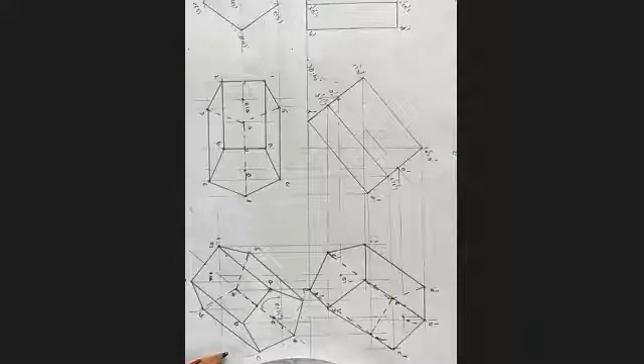Finished? I can take only 2 problems in 2 slots. 40 minutes, maximum 2 problems. Yes, Bhavya, Pragati, finished? No response at all. Finished, sir. Take one more problem.

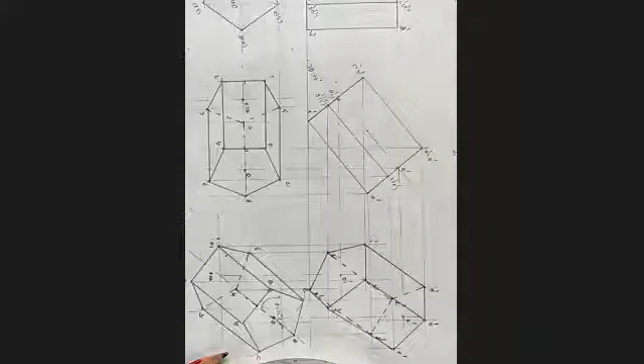A cone of 50 mm base diameter and 60 mm axis length rests on HP on one of its generators. Draw its projection when the axis is inclined to VP at 30 degrees.

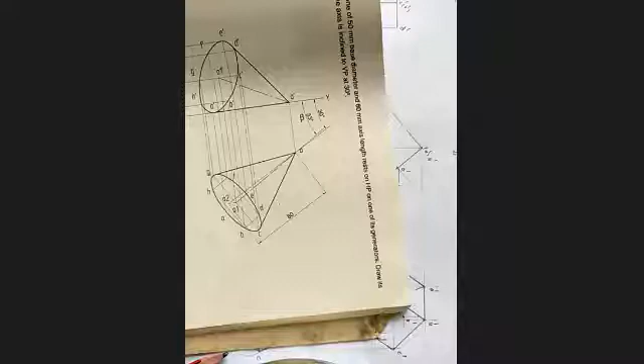Finished? Noted down? Yes, sir. See, here only one angle is given, but still it is a 3-stage problem. Now, same procedure. First, draw the XY line. What is the given object? Cone. Where is it placed? HP. How is it placed?

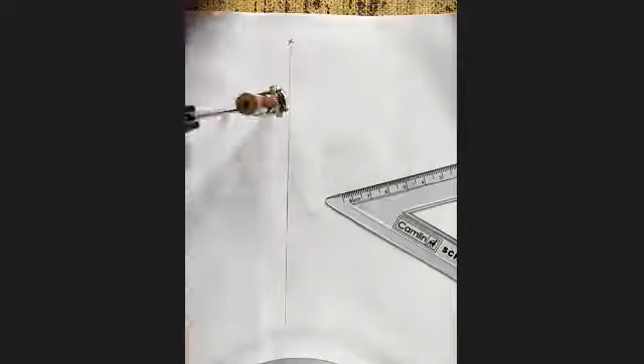There is no question of how it is placed. Agree? Why? Anyone? A circle does not have any corner or side. Earlier polygons had a side or corner, so we said where it is placed and how it is placed, side or corner. But a circle does not have side or corner, so take whatever you like as corner or side.

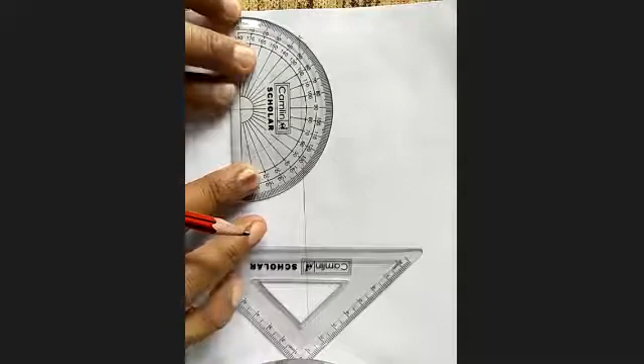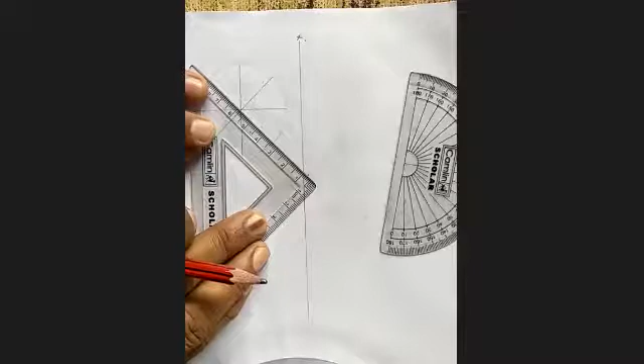I will divide this circle into 8 parts. Cycloid, can you remember? How many parts did I divide it into? Eight parts or 12 parts? Just say whatever. I divided into 12 parts, but now I am dividing into 8. You can divide into 4 also, but I will tell you why I am dividing into 8. So I divided it into 8 parts.

Name it. Is it a prism or pyramid? Tell me. Cone is a prism or pyramid?

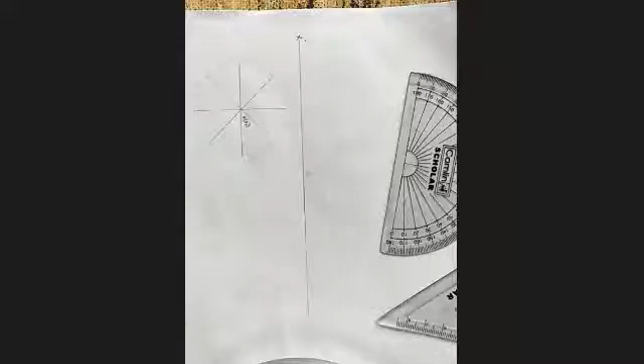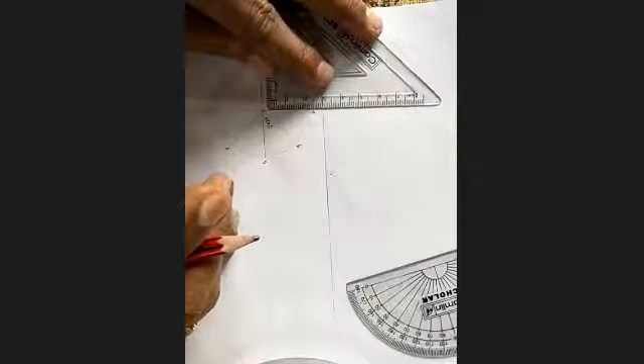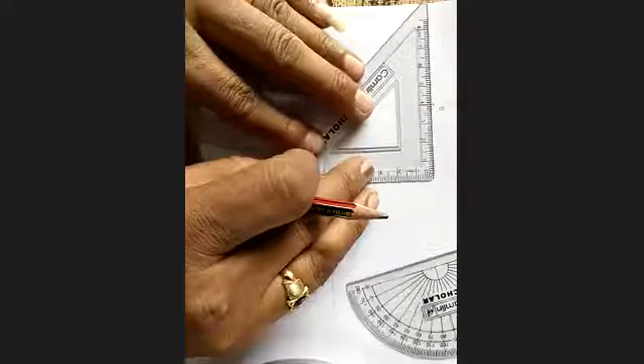Finished. Only one face. Draw the axis line. How much is given? 60. 1, 2, 3, 4, 5, 6. It is 60, and at 60 is the apex. Draw this line and measure; it is 60. Right. Project all the lines.

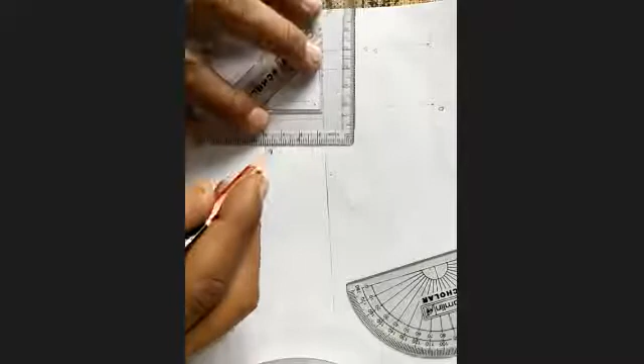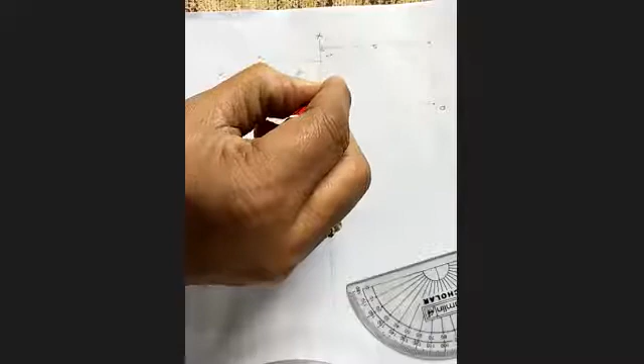Name that. Only one base. 1 dash visible, 2 dash visible, 8 dash not visible, 3 dash visible, 7 dash not visible. This is O1 dash also. 4 dash visible, 6 dash not visible. It is 5 dash. Make this base dark. Extreme end, 5 dash, join with apex. This one, join with apex.

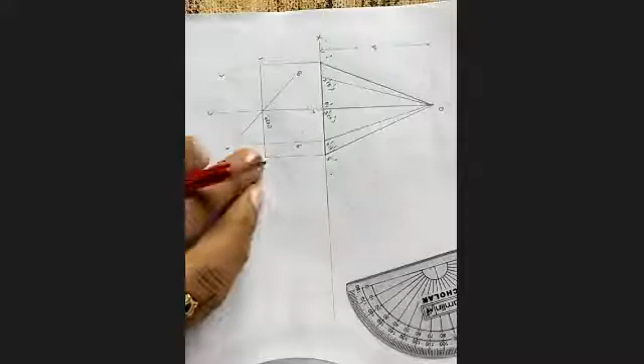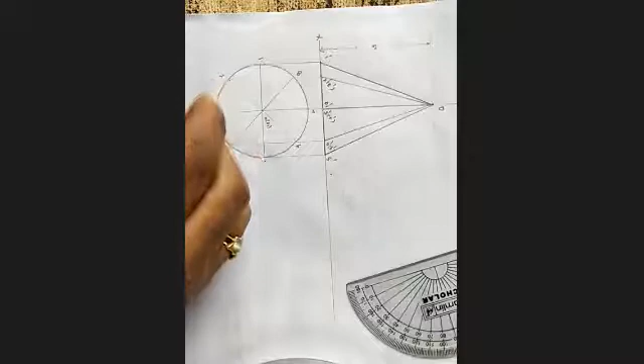This 2 is visible, 8 is not visible, but still make it dark. 3 is visible, make it dark. All generators of one side are visible, the other side is not visible. Finish. Don't make this circle dark, because I use a light pencil; in the compass I always use a 2H pencil only, so I get a light circle. Next, here there is no HP angle.

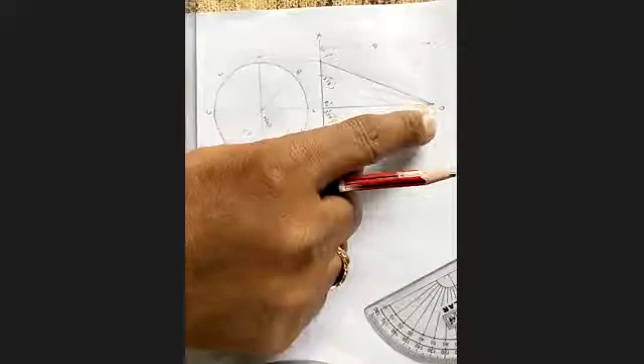A cone with a 50 mm diameter and a 60 mm axis length rests on HP on one of its generators. 5 and O is a generator. 5 dash and O dash is a generator. 1 dash O dash is also a generator. Agree? Yes, sir. Ice cream cone, instead of keeping it on base, keep it in sleeping mode.

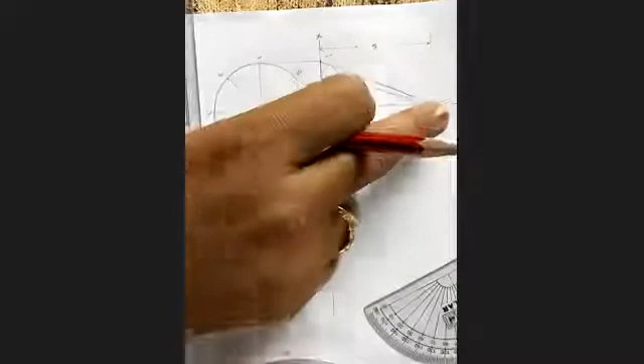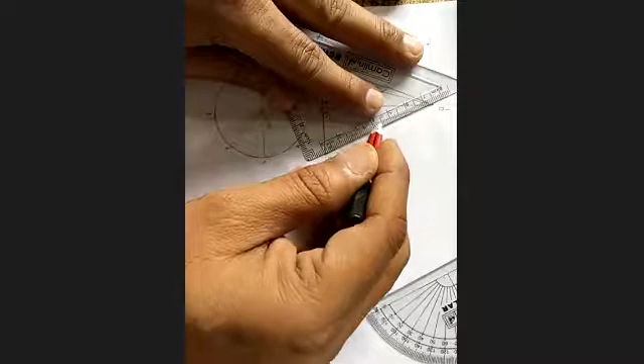Careful, student. Which side do you want, amma? 5 dash O dash or 1 dash O dash? You tell me. Which one you want? I will make it in sleeping mode. 5 dash O dash. Measure 5 dash O dash. So how much is it? Listen carefully. 5 dash. I am measuring 10, 20, 30, 40, 50, 60, 64.

Visible? 64. Visible? Student, yes. Measure 20, 30, 40, 50, 60, 64. What to do, amma? From this point measure 64.

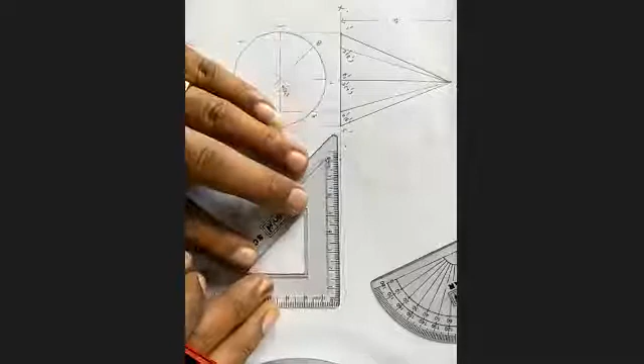See. 10, 20, 30, 40, 50, 60, 64. What is my point? How much? 10, 20, 30, 40, 50, 60, 64. Agree? Yes, sir. This is 5 dash and this is O dash. What happened, amma? It is resting like an ice cream cone on a rack. Instead of base, make it sleeping mode.

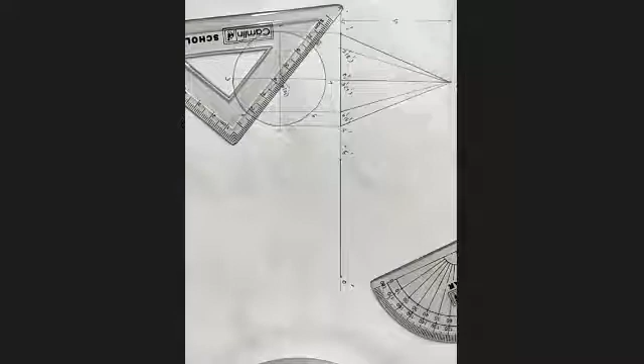Take an empty ice cream cone. You can try. Take one, you can keep it on its base. Can you keep the ice cream cone on its apex? On the apex, statically, no, it cannot. Then you have to keep it on one generator. So I have taken 5 dash O dash. You may take 1 dash O dash also, nothing wrong.

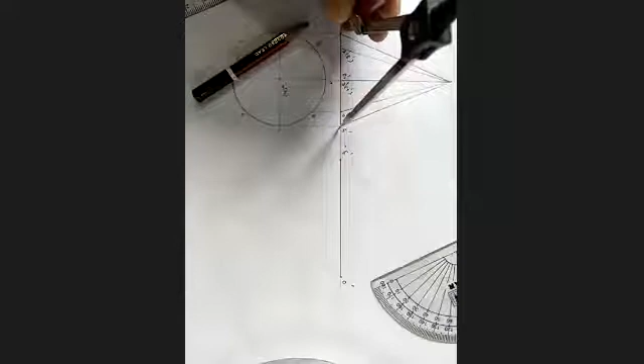After that, can I measure 5 dash to 1 dash, amma? Can I measure 5 dash to 1 dash? Visible? Yes, sir.

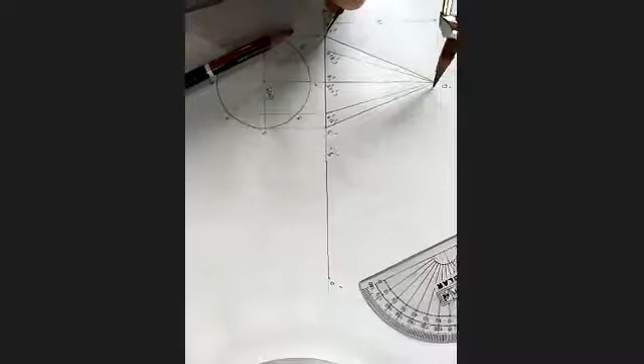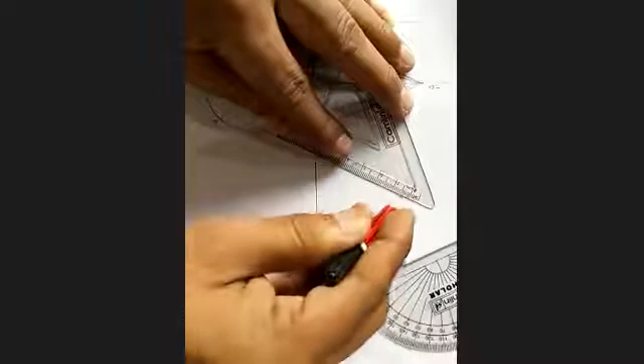This point is called 1 dash, amma. Join all. Who is that? Somebody is making noise.

See, this is your ice cream cone, amma, sleeping. Visible? Yes, sir. Same object set on one of its generators on HP. Whether you take this side or that side does not make any difference. Right. After this, measure, it will come at the midpoint. How much is it? 50. 50 means 2.5. Draw the axis line.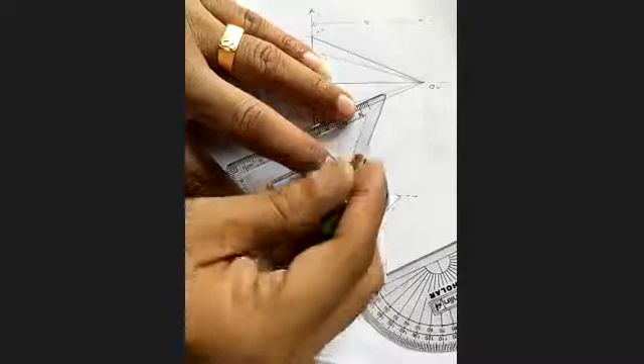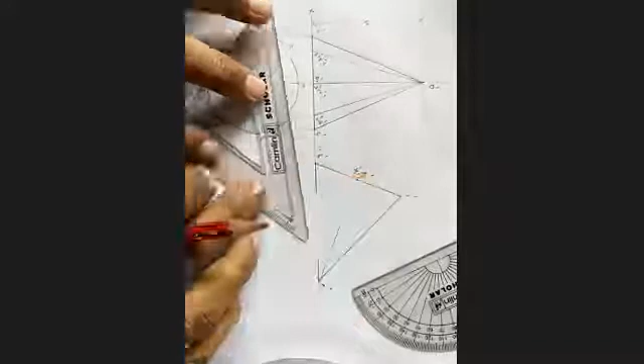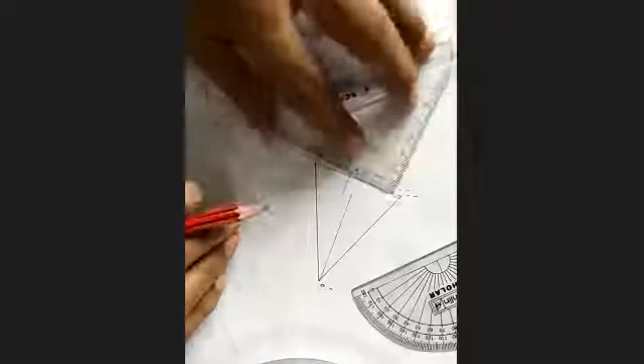Everything again you have to do in a reverse manner. This is the axis line. This point is O1 dash. Measure the other corresponding points. This point is 3 dash, 7 dash. Similarly, measure with respect to this side. 10, 15, 17. Both sides 17. From here, measure 17.

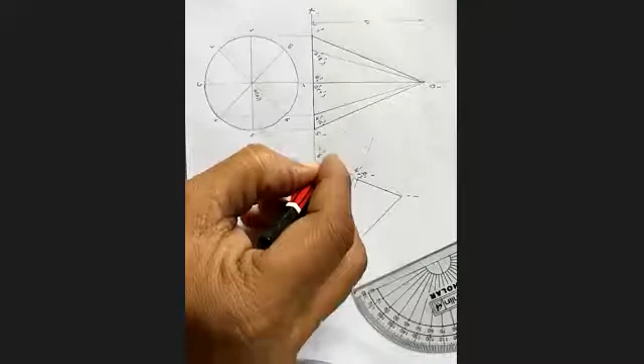This point is 4 dash 6 dash. This point is 2 dash 8 dash. Join them. Finish the same figure I drew. Agree? Here, the trick is that the object may rest on the ground also. There is no hard rule that there is an angle every time. It is resting directly on the ground.

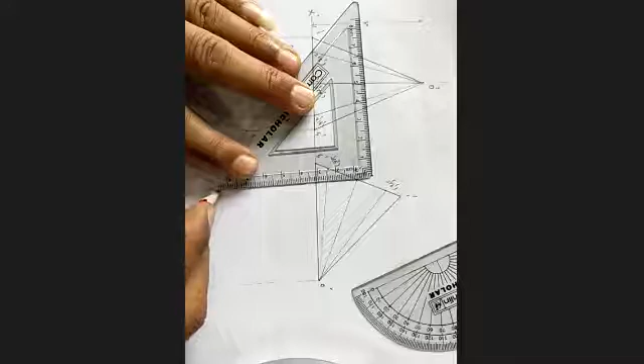Okay, after this, project this O dash. Same procedure. Project this O1. First bring the axis line down. Always target the axis only. This is O and this is O1. Project all the lines.

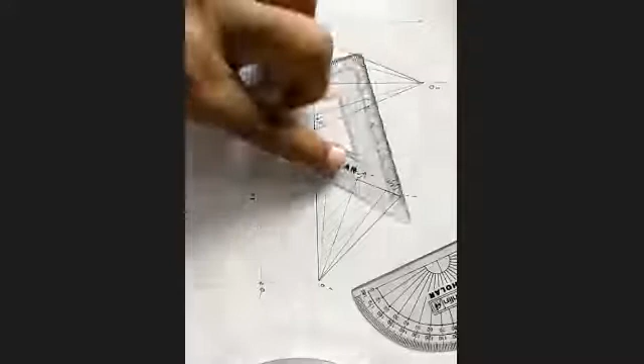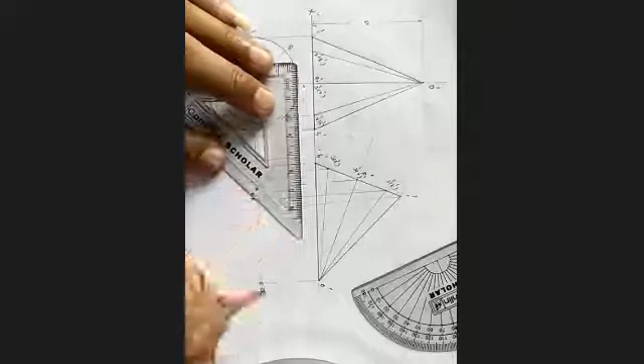Project this line. Project this line. Already this is projected. Project this line. Project these two lines. Already these two are projected. Project this line. Name it.

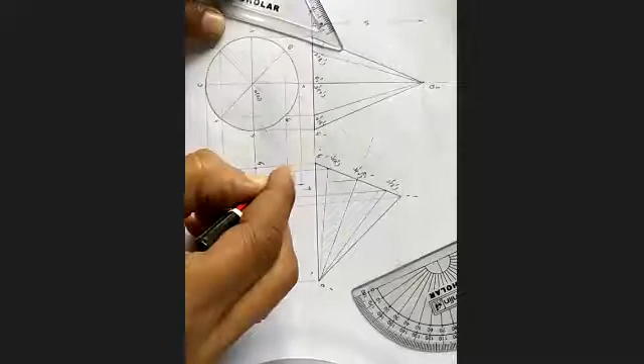Look carefully. 5 dash will come outside, amma. 5 is outside. Careful, amma. 1 is inside. This is 1. See. This is 8. This is 2. This is 3. This is 7. This is 4. This is 6. Careful. 1, 2, 3, 4, 5, 6, 7, 8. Take this experiment. 1 to 7. 3 to 7.

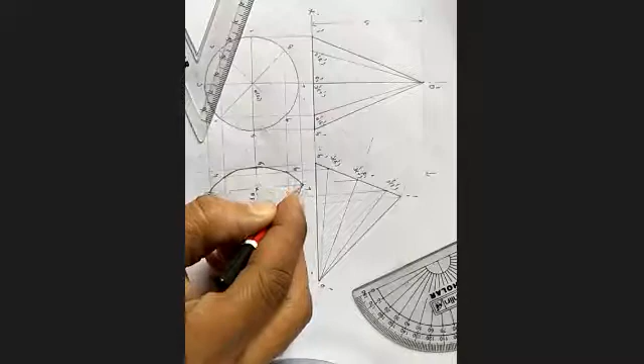Now, I kept it in such a way that this face should be visible. Draw a very smooth curve. Because once a circle is tilted, it will become an ellipse. Finish. Now if you want to draw this internal line, draw it or leave it.

Nothing. Because I want a smooth curve, that's why I divided it into 8 parts. I may take only 4 parts also. It is my wish to divide into 8 parts, 12 parts, 24 parts. Only to get a smooth curve I take that. Finish. Any doubts? No, sir. Got it.

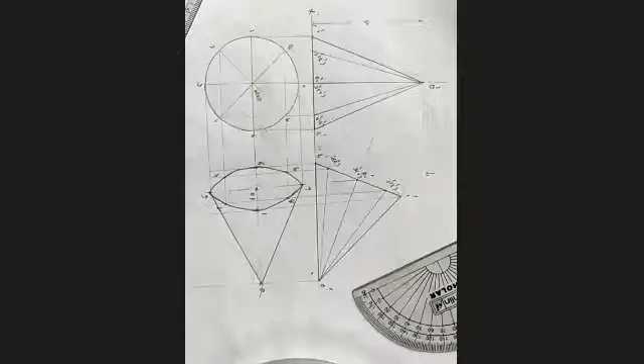Right. After this, take the third stage. It is a medium problem, that's why I have taken it. Whether it's a prism or pyramid, whether two angles are given or not given, it does not matter. Now, here there is no need to take the locus line. Directly you can take 30 degrees. Why? I will tell you the reason.

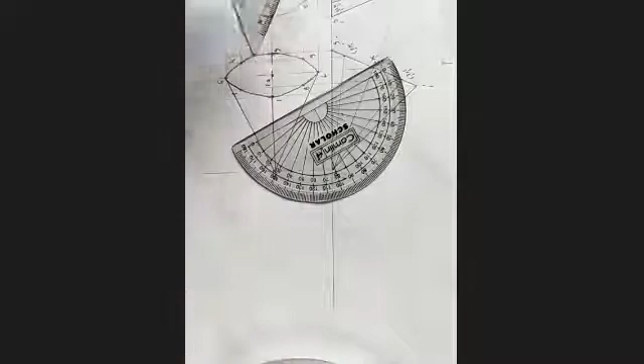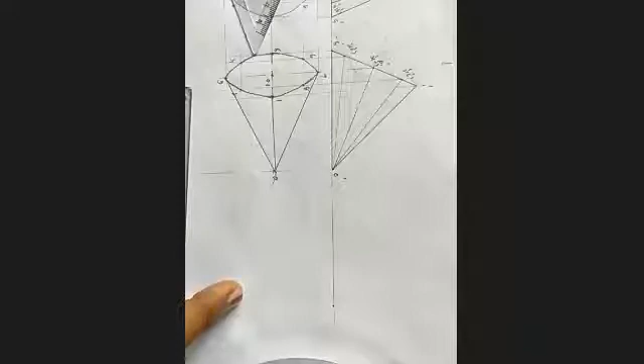I am drawing like this. Whether I have to draw like this or draw like this, tell me. Do you want this method or this method? Because the left side, this or this? No, sir. One, this one, second. This, no sir, this. Yes, okay sir. Take this. This has 30 degrees. Draw this line.

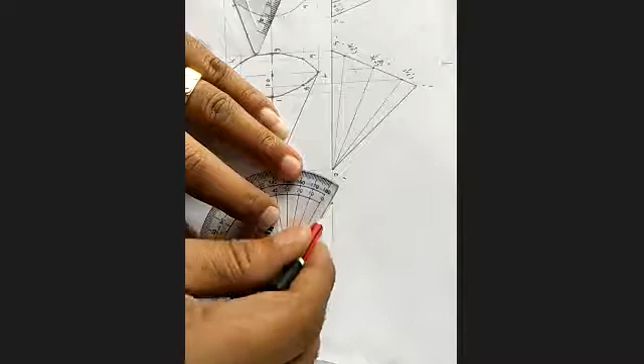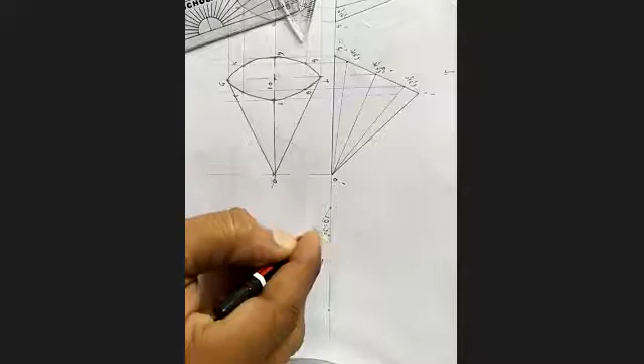This is why, if you take the locus also, nothing is wrong. But if you don't take it, also nothing is wrong. Why? Next, what I will do, now see very carefully. I will fix O, and I will take O nearest to this, because O is the only apex. It cannot cross that entity. So that's why it is the safer zone, nearest to that. O. Next.

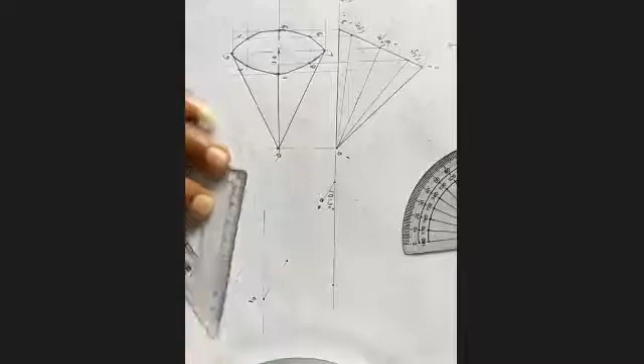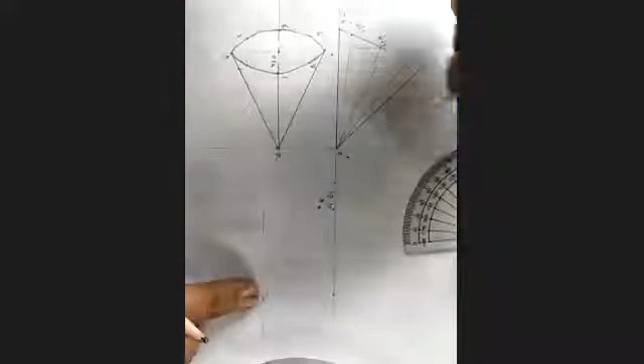First method, true median. How much? 60. Same, and 1, 2, 1, 2, 3, 4, 5, 6. This is 6. This is O1. Right. Draw the locus line. O1, locus line. Next, take this O2, O1A. O2, O1A. See, check this. O is already fixed. Cut. See, this angle is very marginal. O1A.

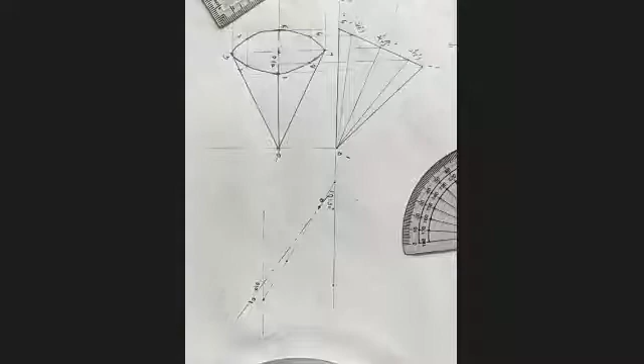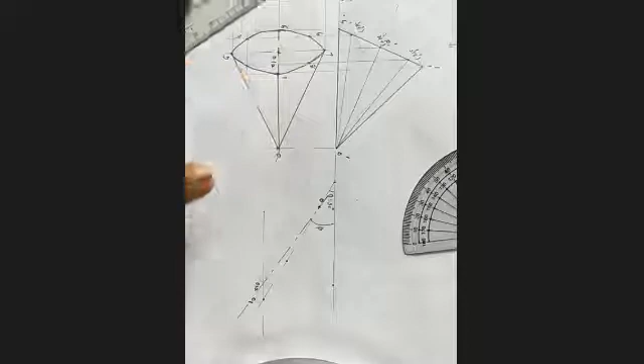Right. O1A. So that is the O1A. This. Right. After this, the same thing we have to copy. So now we got the beta angle. We got this as beta. Now take this. First measure 1 to 5. How much is it? It is almost 12. O1A. Measure 12. So how much? The internal point is 1, the external is 5. So 1 and 5 we got.

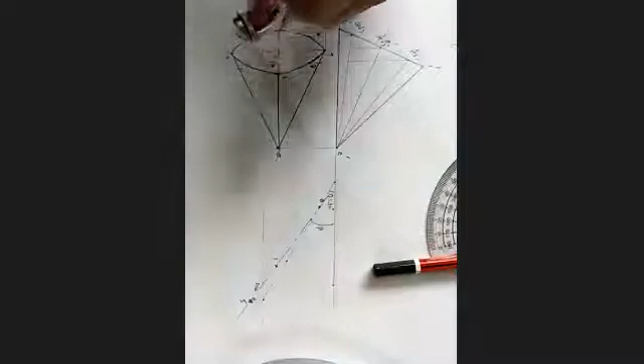Now take the leftover points, the same with respect to this. Very simple to get it. 1 to 6, 5 to 6. First take 5 to 6. 5 to 4 same. 5 to 6. 5 to 4. 5 to 6. Reverse: 1 to 6, 1 to 4. 1 to 6, 1 to 4. See. Next, 1, 5 to 7. 5 to 3. 5 to 7.

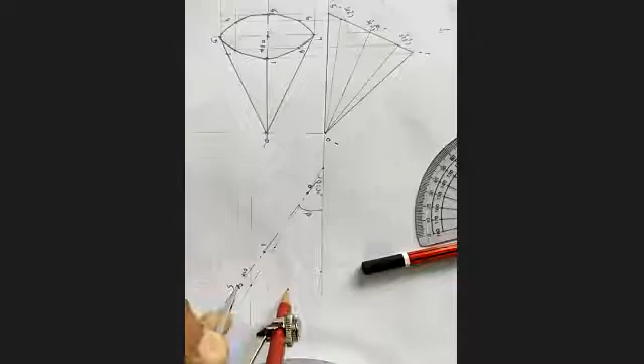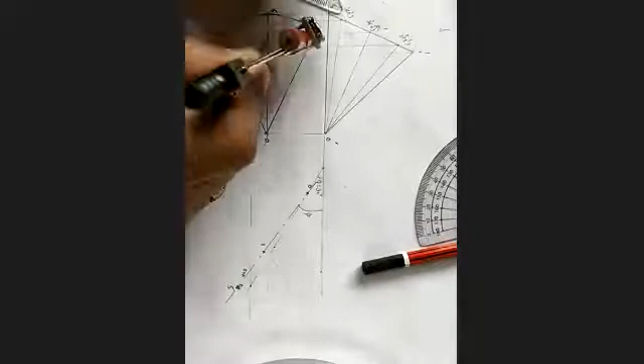Next, 1 to 7. Almost all the same, because it is. Take this, 1, cut. Cut this point. See that here somewhere it is not cutting; I will drag it later. 5 to 8, and 5 to 2 same. 5 to 8. Then 1 to 8. 1 to 2. This is 8. This is 2.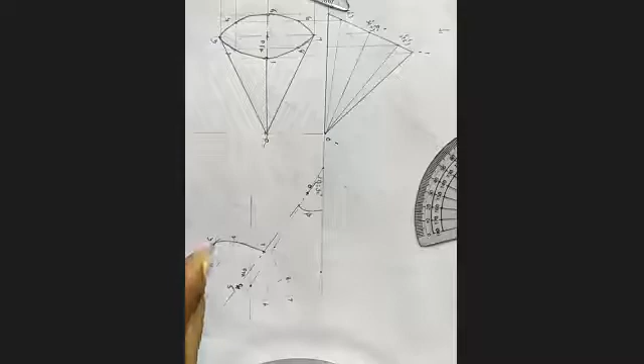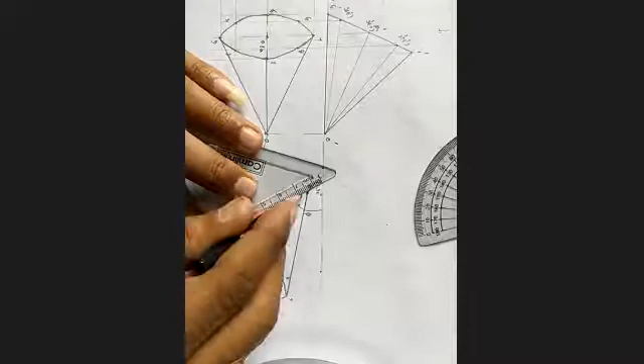See what I will do. Drag this slide a little bit. Here it is. It is 1, it is 2, it is 3, it is 4, 5, this is 6, this is 7, this is 8. Join with a very smooth curve. 1 to 2, 2 to 3, 3 to 4, 4 to 5, 5 to 6, 6 to 7, 7 to 8, 8 to this. Join the extremes. To get this smooth curve only, I have taken these many points. This is the location.

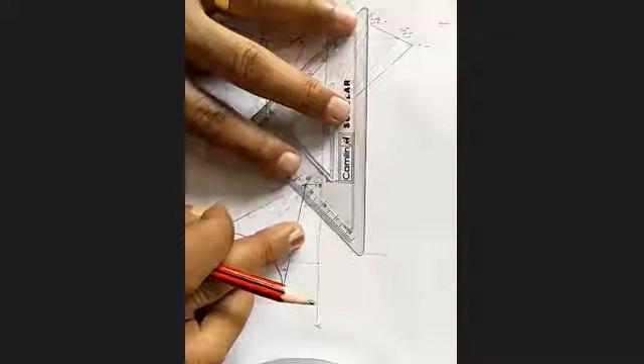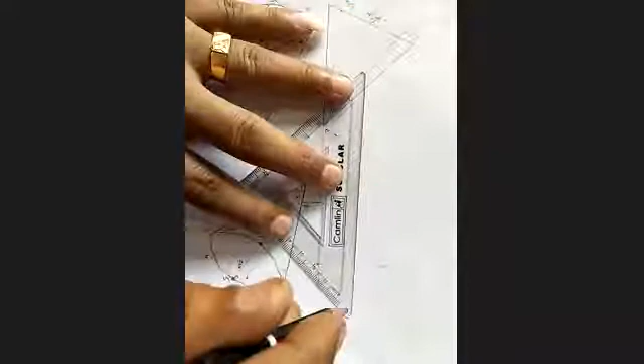Draw this XY line. Take O. O is here only, no need to take this. Obviously, it is O dash. Take O1 first. Take this O1. This is O1 dash. Next, 1. Where is number 1? 1 is at the top. 2 is also at the top. 3 is on the axis line.

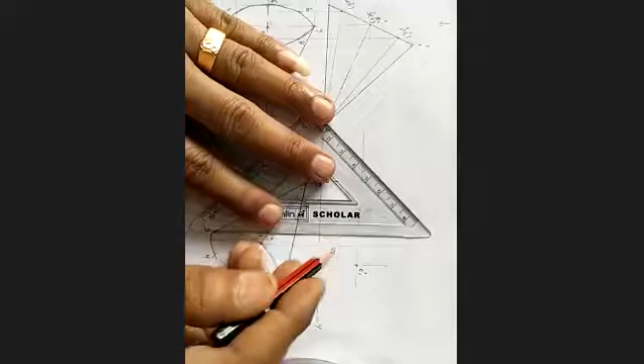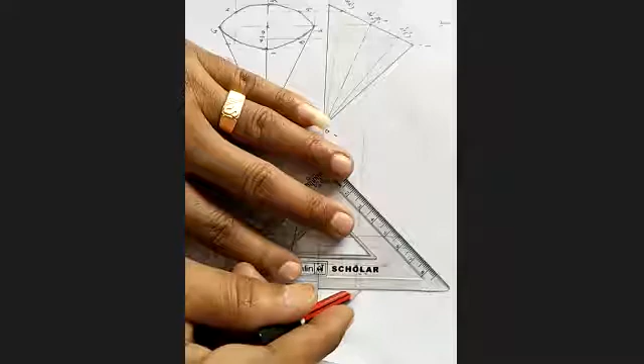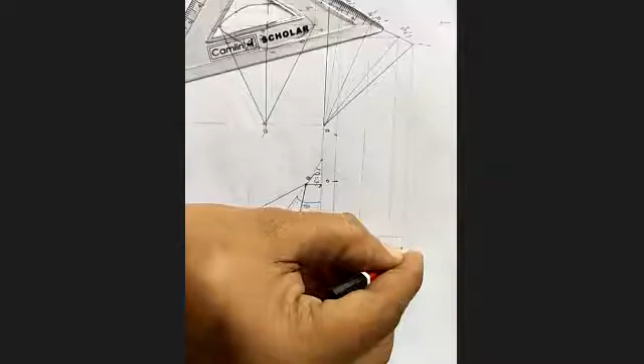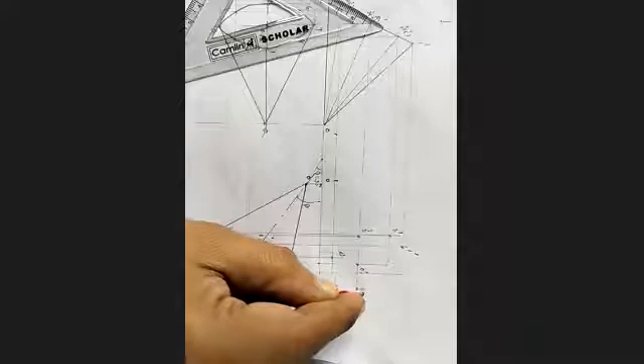4. This is 4. 5 is lying down, the generator. 6, draw 6 here. 7, draw 7 on the XY line. 8, draw 8. See, project all the lines. One. 2. 3 is already there. Take this line. Marking of points is very important. 1, this is 1, 1 dash. 2, 2 dash. 3, 3 dash. 4, 4 dash. 5, 5 dash. 6, 6 dash. 7, 7 dash. It is 8 dash.

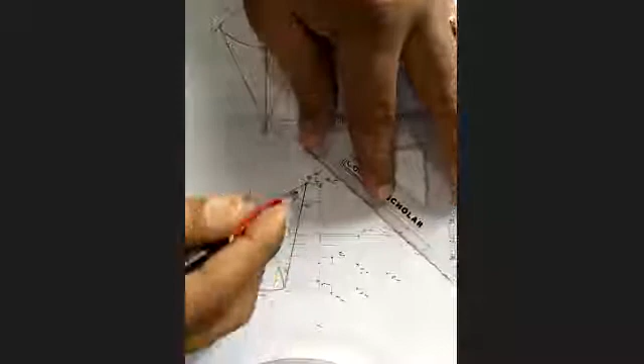See, join with. I kept it in such a way that this space should be visible. That's why I'm telling you: keep the object in such a way. This is O dash. Take this extreme end, take up to here. This space is completely visible. Make one.